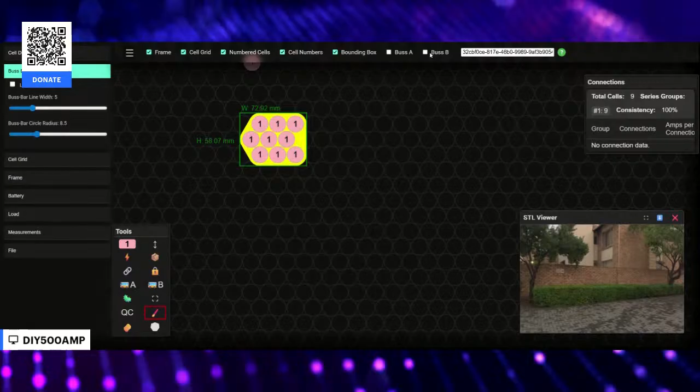Let's change from 1 to 2 to make another battery, another continuation. See, another series. See, how about that? Now we have two series, two groups. See, and it's telling you how many amps you can run in this.

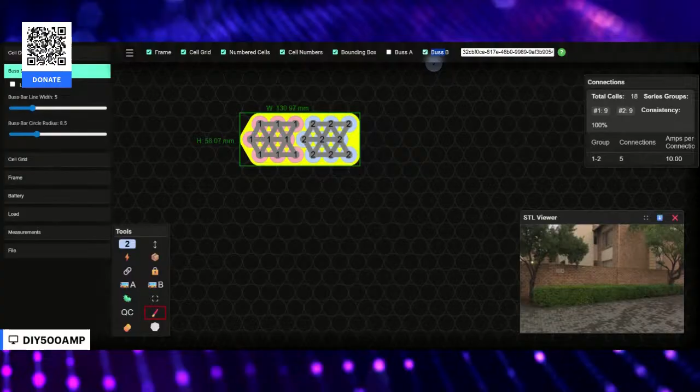Now, if I activate the bus bar, you're gonna see the difference. See, one bus bar is gonna be like this, the other one is gonna be like that. So if I complicate this even more, let's go.

Let me start over. Okay, you use the erase tool, which is this one, and I erase everything. Let's start over, okay? I select the pencil again, and I select the first one. Let's make it more simple, just like this.

Then you can select here number 2, or I'm gonna show you another trick. I can click A and D and check how the numbers go up and down. In the keyboard, A and D.

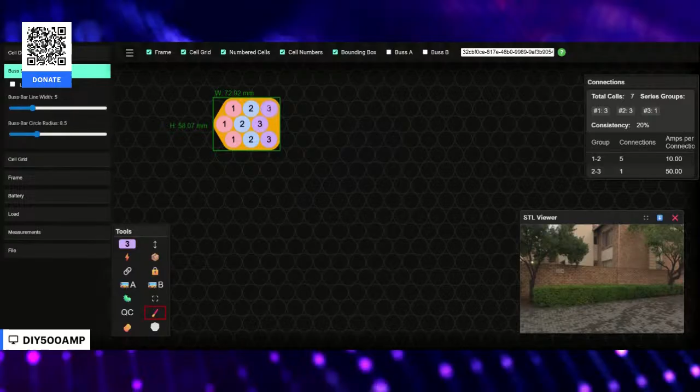So I'm gonna use number 2, number 3, number 4. Is because I want to show you, for example, a 36-volt battery, which is 10 series. Now we have what is going to be a 36-volt battery.

So now if I go in the bus bar, look at how cool this is. It recognizes that. If I select the other one, that's the connection you have to do. One side of the battery, the other side.

If I put both, it's going to show like this, but you know it's both sides together. One side and the other side.

Now, next, if you want to modify this bus bar, you see in the bus bar here, you can click, for example, lock, and then scroll and make it one solid bus bar. See?

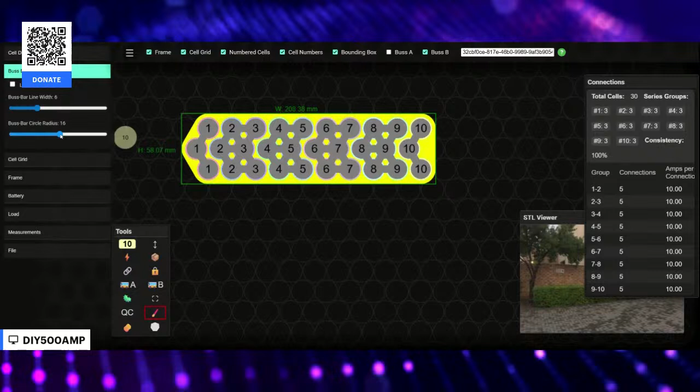Or you can unlock and then work the circle first, which in the circles I like to go, it depends what cell is. I like to go all the way to 15 or 16. Let's put it 15. And then you modify how wide it's gonna be.

And I like going 10 sometimes or 8. It depends how much current do you need. If you need a lot of current, then put it solid, just like this in 13. 13, make it solid already.

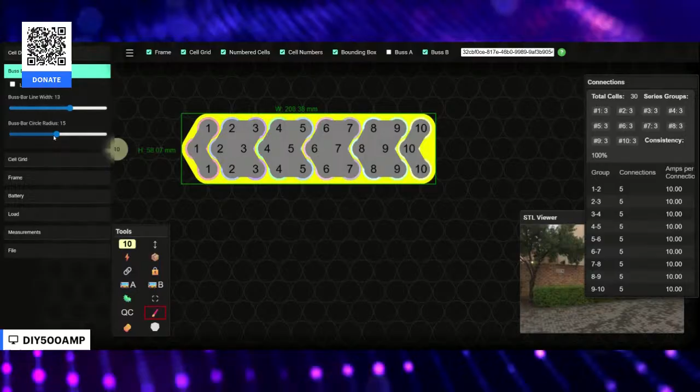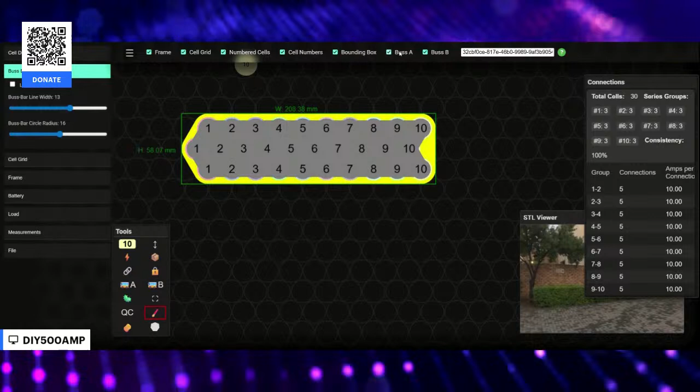See, and here you can modify, you want a wider or smaller bus bar, okay? I have that here. Now I have this bus bar, see? That's how you work the bus bar.

Now, we have the bus bar part. Let's remove the bus bar. Now we can work with the frame. The frame, you can make it wider or thinner, see?

And that's gonna be the frame that is gonna hold the batteries, but you can make it square. You don't have to go completely like that. I can say, okay, I want a square, and not only that, I want the circuit linear. And now you have a completely square frame.

See? However, remember the position that I put this, then I have to modify the position of the cells, right? But let's say that I want to put it back in hexagonal, keep it the frame square. You can do that too.

Or I can put it back in the way that I wanted originally and make it a round frame. See? Just like that. So you can play with that, changing the frame, the quality.

This is important. Keep it for the moment at 32. If you go higher, the computer is gonna get really slow. Why? Because higher quality requires a lot of computing, so it can make your computer slow.

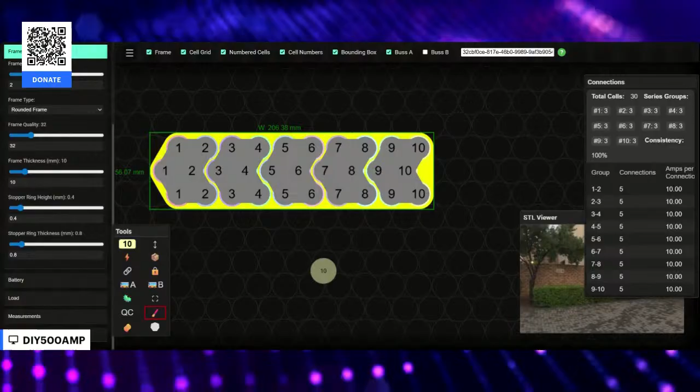Can you print out the bus bar along? Yes, I'm gonna show you now, that's the nice part of the software. For example, you wanna print out only the bus bar. Now I activate the bus bar, let me put it more nice. Let's see, you wanna make a nice fancy bus bar and don't wanna make it like this, you wanna make it look nice like this, right? Maybe smaller, maybe 12, see the circle to maintain the circles, just like that.

Now, first of all, you need to have a license in the software to do this part. I have a license right now, my license is put it here. Please don't copy this because it's not the complete license. Get your own license, this one is not gonna work, but you need more numbers that are hidden. But anyway, Joe is a nice person, if you really want to try the software, talk to him, he maybe give you a trial.

So now, how do I do that? How am I gonna produce only the bus bar here? Look at this option, it generates only the frame. This one generates a case, you can make a case for this. This one allows you to share the battery with somebody else. Now this one is bus bar A, bus bar B.

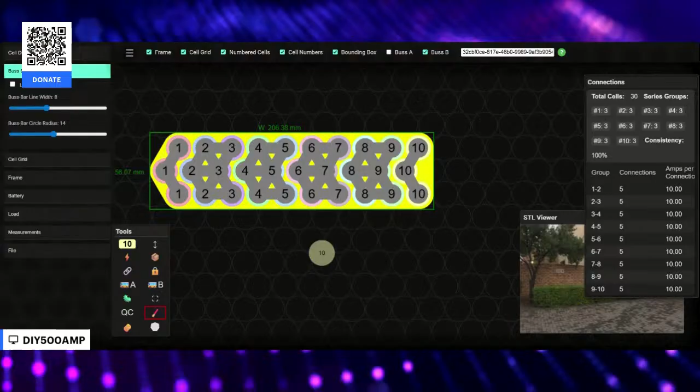Let's start with the B. You click here, bus bar, click only once and wait. Now you have to wait, because now in the background it's working, see, it just came out. So let me make another, let me call this test, and now inside there that's gonna be bus bar B. I'm gonna save it, okay, I save it, and then now I'm gonna do the A.

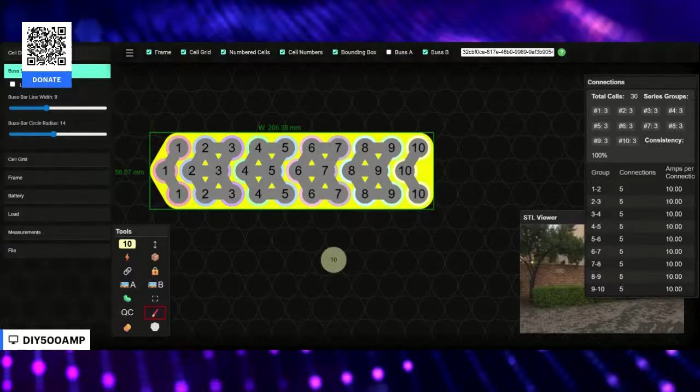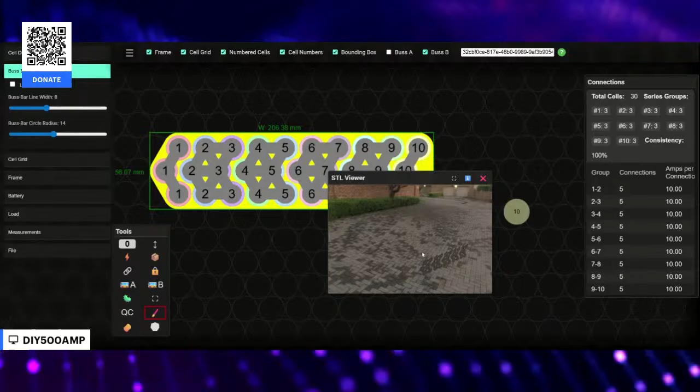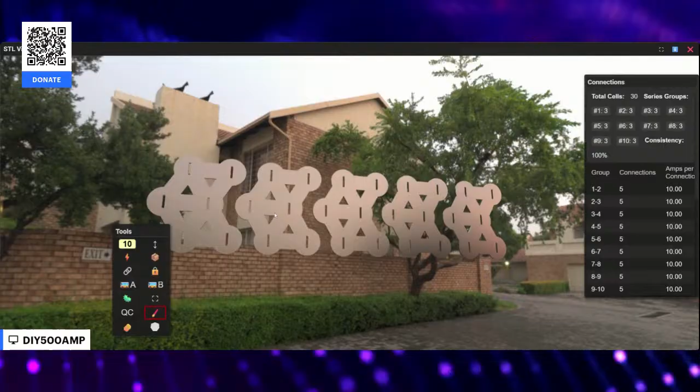Okay, bus bar A, same thing. Wait, it's producing that, and now it's bus bar A. Now I have the files that I can go in Tinkercad and print, or in a printer. However, I haven't shown you this. What I put, bus bars, you can see the bus bars here, look at how cool this is. You need to press Control, keep it pressed, and zoom, or you can go full screen. Look at how cool this is, and the bus bar automatically goes with the lead. That's a modification that I requested, and he did it for me. So you can have your leads and mark the leads, so when I cut this in the laser, it cuts just like that. Buddy, it's amazing, that easy you can get the bus bars.

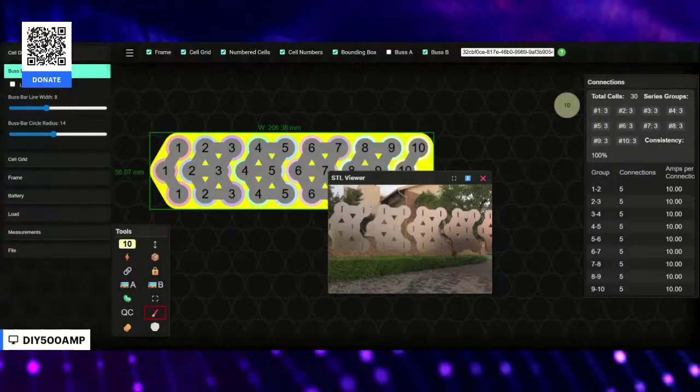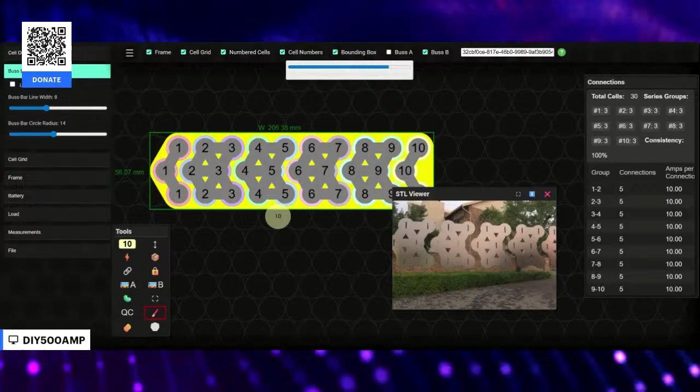However, not only the bus bars, I can get the frame. Let's make the frame now. I click here once and wait. The frame takes longer, okay, just wait for it. Wait, see, it's making it. And once it's making it, instead of opening the file to download, it's gonna show you first the frame here. Look at this, now we have the frame here, you can see how cool this is.

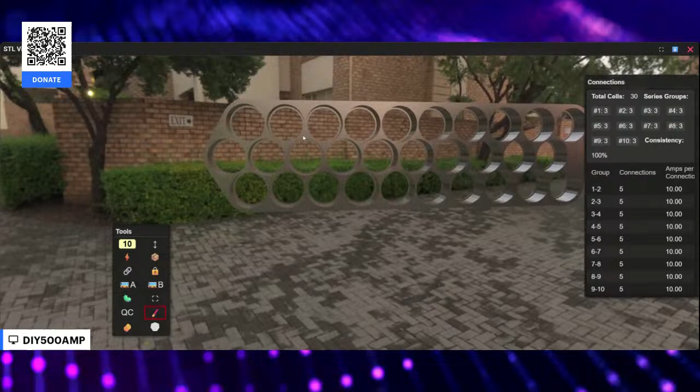So if you understand that you need a wider, see, cell stoppers, how do you fix that? Then you go in the frame, scroll down and see the cell stoppers. This one, the bottom one, is gonna control how wide the circle is gonna be. This one is gonna control how thick the stopper is gonna be. Honestly, keep it at 0.4 or 0.5, then this one I like to put at 1.2. Okay, now that I have that, let's regenerate the frame again. Let me close this to not create confusion. Click once and wait, it's regenerating the frame, and wait until that finishes. Boom, you notice, now I have a wider cell stopper here.

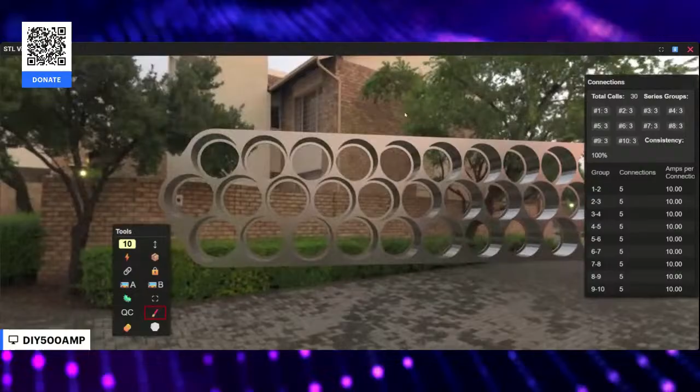You want to make the frame even more quality, you can. How, and here you see the blue thing? That's where I download the frame. I click here, now I'm gonna call it frame.

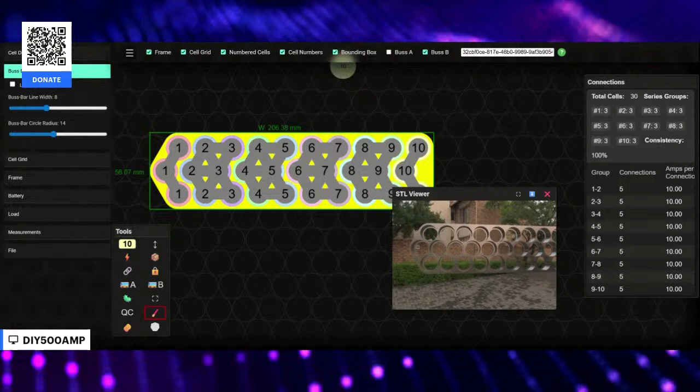I download it. Okay, let me share my full screen. He put a lot of work. Yes man, let me share my full screen, give me one second, this way is gonna be easier. My entire screen, okay.

Okay, I know you see a mess, but it's better like this. Now what I did, I saved it here, the frame, and I saved the bus bars. Okay, now look at how cool this is gonna be.

Now I'm gonna open Tinkercad, for example. You can see it, right? It's Tinkercad, let me make sure you guys can see it. I'm waiting for you to confirm.

I know the video is kind of behind, but I'm sure you're looking at it.

In Tinkercad, I create a new design and open this. Here I can import the design that I just did. Let me find it, it was in client 28. Yeah, test. Now I'm gonna import the frame. Import the frame, and there we go. We got the frame now that we just did in the software.

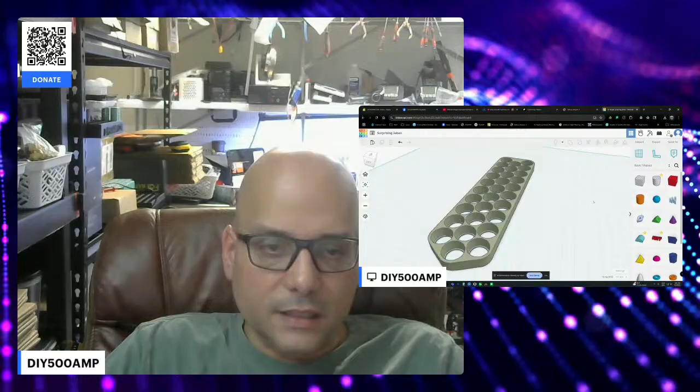It's not that amazing. This is a bug, I guess. Yep, look at that, I found a bug, first time that's happened. I have to recreate that frame. Oh, I know what it is. Let's delete this and go back to the software.

As I mentioned, you remember you can increase the quality. We have to go in frame and change the quality, let me put it in 64. Now we need to recreate the frame. Click frame, that's gonna take longer. The higher that number, the longer it's gonna take, but it's gonna be a higher quality frame. 64.

The default is 32 to be able to move it in the software more easily, but once you finish, crank up that number.

See, now we have the frame here. Now I have to re-download. Clicking here, I'm gonna download the frame. Click frame and override it. Now I save it, go back to Tinkercad, import the frame, and let me see if that problem goes away. It's a bigger file, more quality. I guess that fixed the problem.

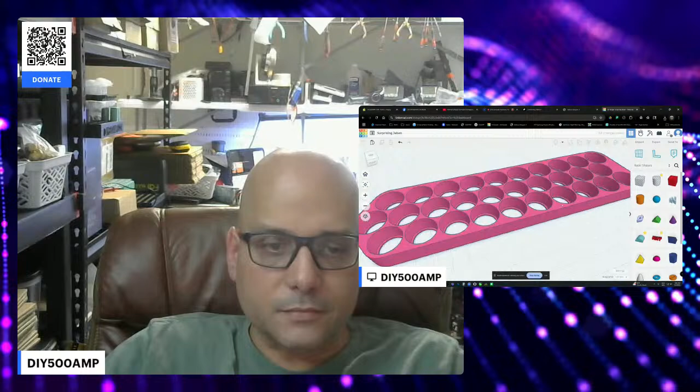Yep, now the problem is gone. See how high quality it is? It doesn't look square anymore. See, very high quality.

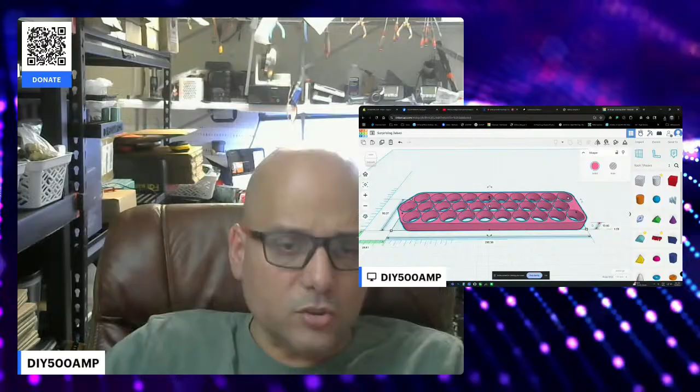Now we have the frame that you can manipulate in here if you want it less thick. In Tinkercad, you put this here, we have 10 millimeters. You can do it as well in the software, you don't have to do it in Tinkercad, you can do it in the software.

Where I am here, you can go in the frame, set the thickness that says 10. I can make it taller, like 33, for example. Regenerate the frame.

Look at this, remember, only click once and wait. We have that in 64, it's gonna take time. It's generating.

Boom, look at this, now we have a thick frame. Look at that, oh, oops, look at that.

If you measure exactly, you can close all the cells with this. Again, if you want that now, you can download it here, clicking here, overwrite the one that I have, save. I'm gonna open Tinkercad, delete this, and import again the frame.

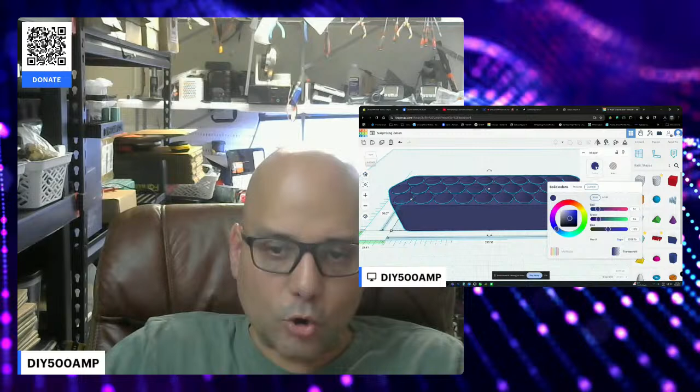Boom. Let me change the color to something easier to see, like this one. Now we have the frame here. Look at that, man.

Now, what about if you want the cells like I do? So you go back to the software, and you can click here. You see this green thing? That's the cells, you can click that.

Wait, wait, and now I have cells. You put the name cells, save it. Now I can go back to Tinkercad, import. Now I'm gonna import the cells. Import.

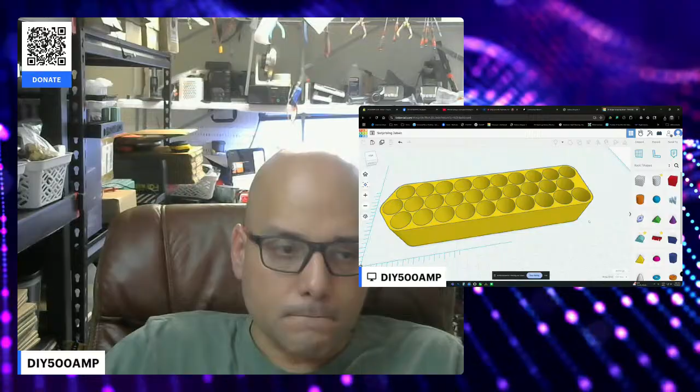Now let me teach you, look at where they went. That's the cells. Remember, they're only 10 millimeters, so I want to make it, what, 70 millimeters. See what I did? Change it here, 70 millimeters. Now we have the cells.

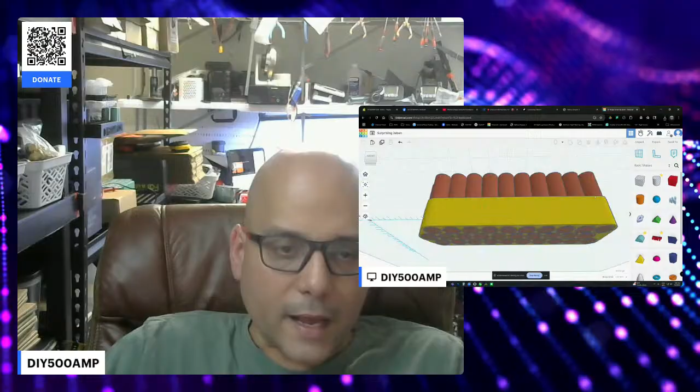What about if I want now the bus bars? That cell looks awful, let me put it in another color, green. Okay.

What about if you want this frame instead to be 33? Let's put it back in 10. And now what about if you want it on top?

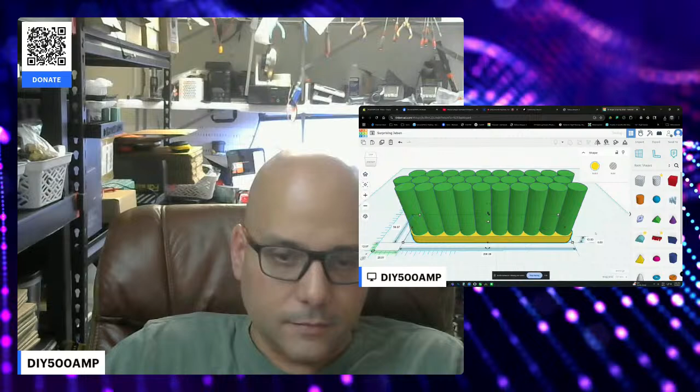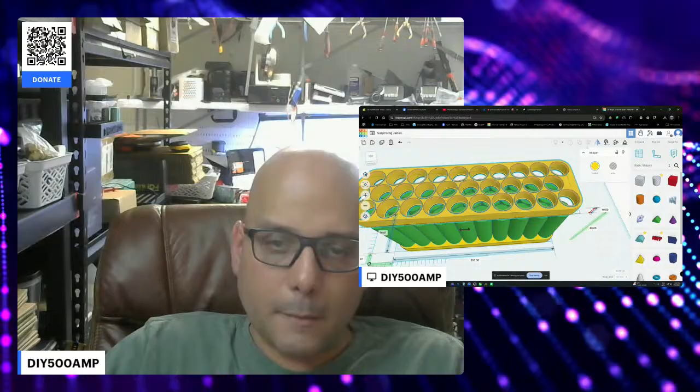Well, in here Tinkercad, I duplicate here, go all the way up, and then turn it. The stopper is backwards, I can click here, here, and click here, and it's gonna flip it. See? Now I push it down again until it goes to the cells. There, now I have a battery.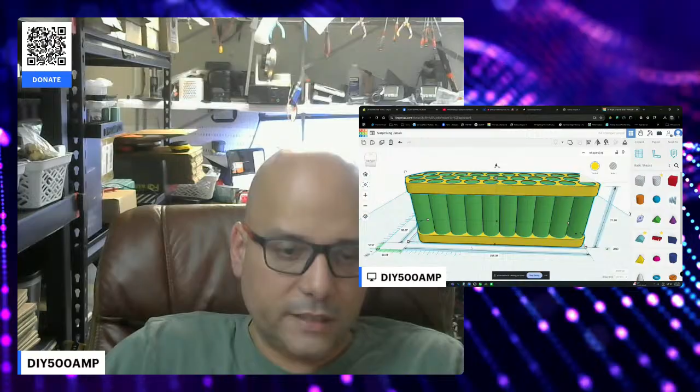What about if I want to use the bus bar? Actually, I'm gonna leave this little bit, the whole thing, because I'm gonna put the bus bars in the bottom. Now I'm gonna import the bus bars.

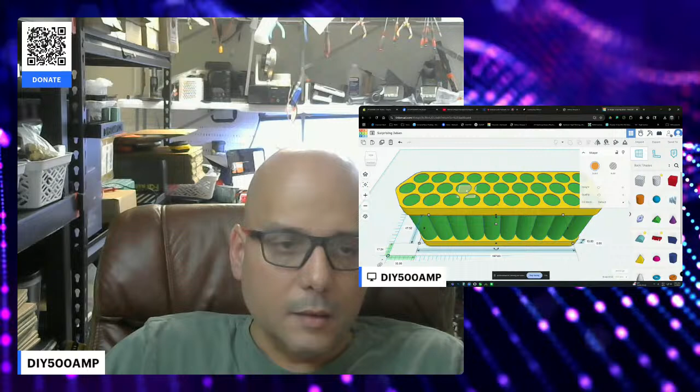Bus bar B. Normally I like to put it on the top. See, that's the bus bar. How I put it on the top, I like to use this tool, put it here. That's my floor now, and I press D. Boom, now I have the bus bar.

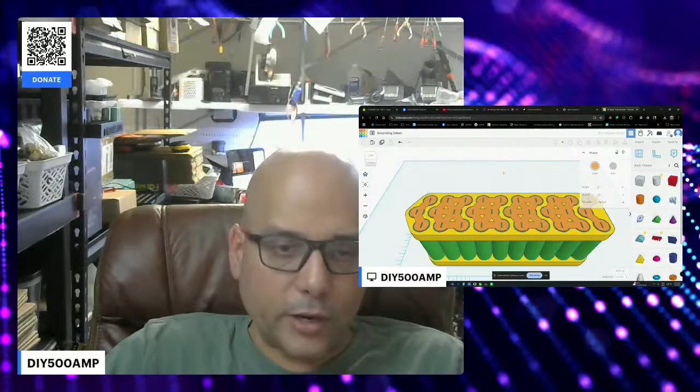But what an ugly look that bus bar is, because by default it's 10 millimeters, which I like to make zero point 0.3. Boom. Now you have a zero point 0.3 copper. Let me put it copper color. Copper.

Now I need to import the next one, that is the bus bar A. I'm sorry, I'm saving instead of importing. Let me cancel that.

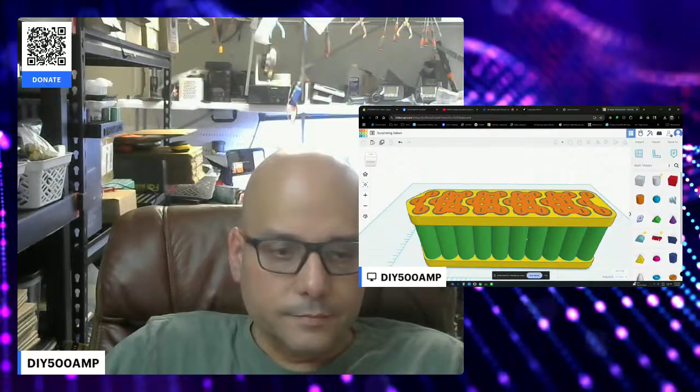Now I can import the other bus bar, the bus bar B, no, the A, and that's gonna import to the bottom. And remember, it's thick, I'm gonna put it back to zero point 0.3. Boom, and change that color to bus bar color. This. Now we have it, but it's not attached. I mean, it's not perfect, but I can fix that.

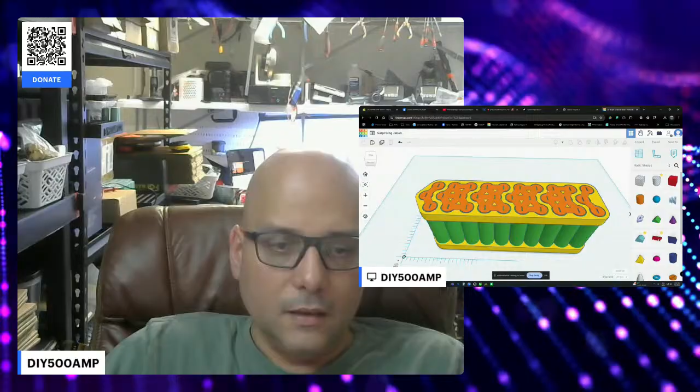Now we have the battery. So if I want to select the whole thing and lift it, so to be able to see the bus bar in the bottom, look at that.

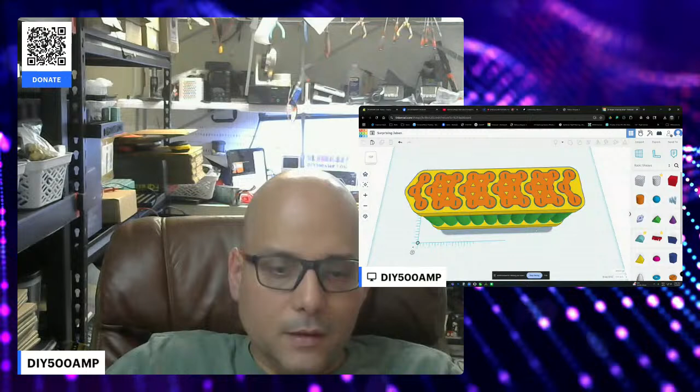Now your question, what about if you want only the bus bars? For example, you remember I have this saved already. If I go in my 3D printer, I'm gonna open my 3D printer, for example, the Bambu.

Let me make sure everybody is looking and I'm not talking alone.

Okay, you're good? Good. I open the Bambu software. It's still open. It's looking for the, let me turn on the printer. It's looking for the printer.

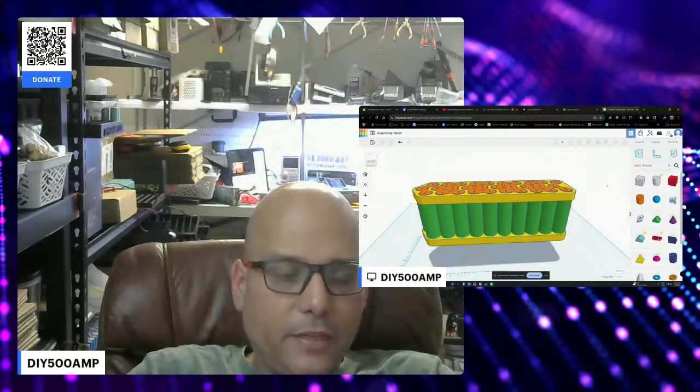Remember, the bus bar that Tinkercad, that the software produces, is to be cut in the laser. This one is to be printed.

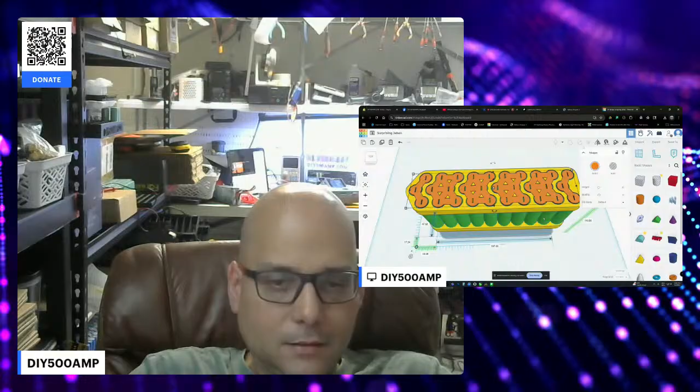So I'm gonna select the bus bar now, just the bus bar, and then export, and you're gonna export as a STL. That's the laser, I mean the 3D printer format.

I'm gonna call it bus bar, bus bar A, and save. And then the next bus bar, export, bus bar B, save.

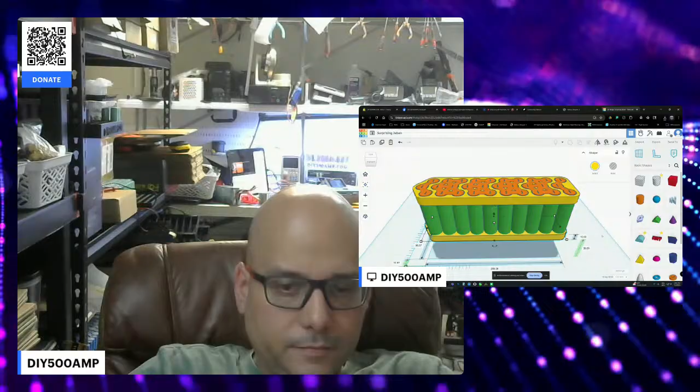Now I want to export the... I got it already, I guess I got it already. But this version is 10 millimeters. Let me export the frame. Export. This one is gonna be the frame. Frame two, I'm gonna call it frame two.

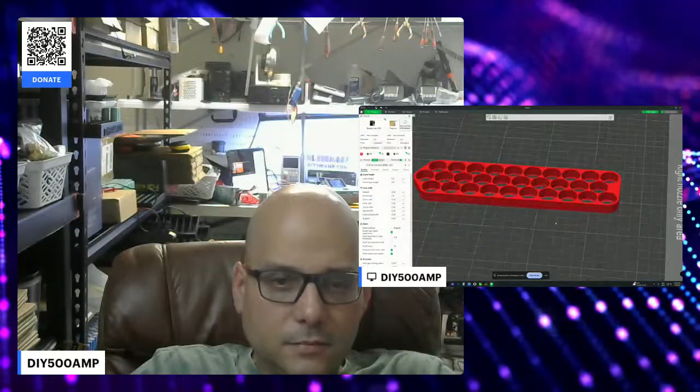Okay, now I go back to the printer and now I import that I just did, which is inside here, frame two. Now I have the frame, see, ready to print. I want the bus bar A, see, very thin, bus bar B. I click here in the printer to accommodate everything for me, see, and now it's ready to print.

However, I want to change the color. My printer, I can change color. So I can select everything and I can select, for example, black ABS or whatever I want. Whatever I want, I can do in this printer.

So if I go back, synchronize now to see all my filaments, let me go back in my filaments and select another color. I need to add it, the color. Sorry about that, I need to add that in here. Let me add another color.

Instead of black, let's see blue. White. Now I can print that in white. And that's how you can print these bus bars.

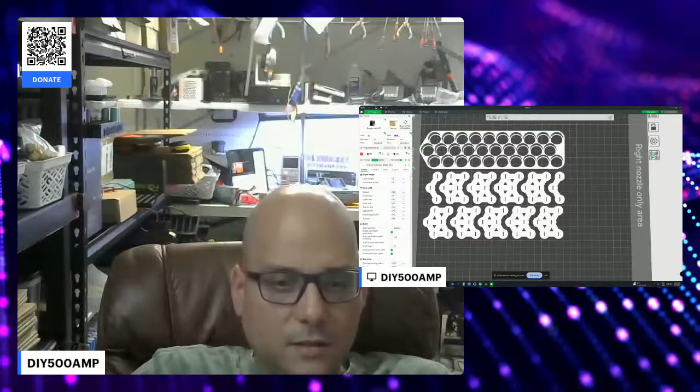And then once you have that printed, you can use a magic marker on top of a copper piece. Once you have this piece printed, I mean, you don't have to go with zero, that's too thin. You can go even with a thicker 1 millimeter, for example, and print that and use it. However, this one you want to keep like that because that's gonna be your real cell holder. It's gonna print just like that.

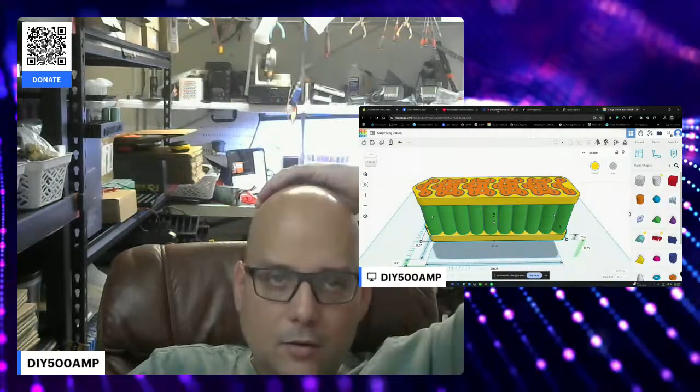Okay buddy, and that's how have you played with making a case for packs? Yes, let me show you something.

Now I'm gonna go back in Tinkercad, open my designs, and you see the designs. You remember the designs for the cells? That's how, look at this, I make this triangle for a client.

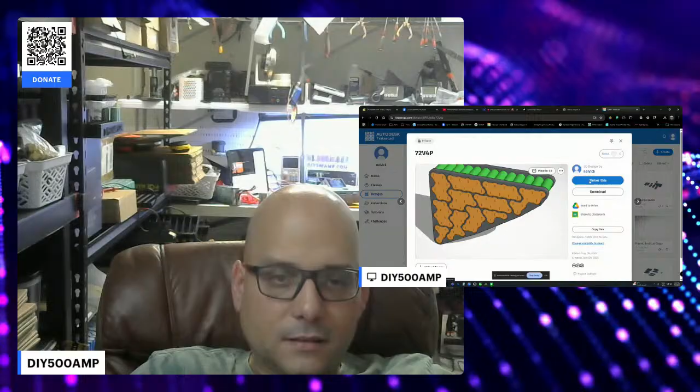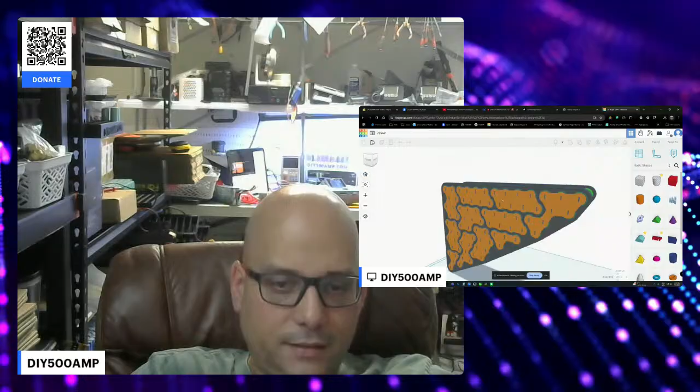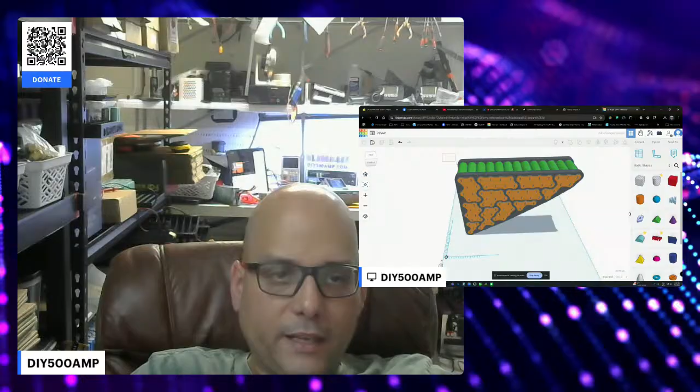Look at this triangle, buddy. I can print this and cut this in the laser, and I print this triangle in my printer and build this. That's the beauty of this. If you can see it here, you can measure it. Look, I'm gonna put the ruler on the floor, and now I have measurement when I select something. That's real numbers. If I have these numbers here, I can do it in real life.

Okay, so let me show you now the cases. Maybe I have cases here to show you. Let's see, I may have cases that I built for clients. Let me see. That was the giveaway, maybe it's somewhere else. I'm gonna show you something very nice. Let me see where I put it.

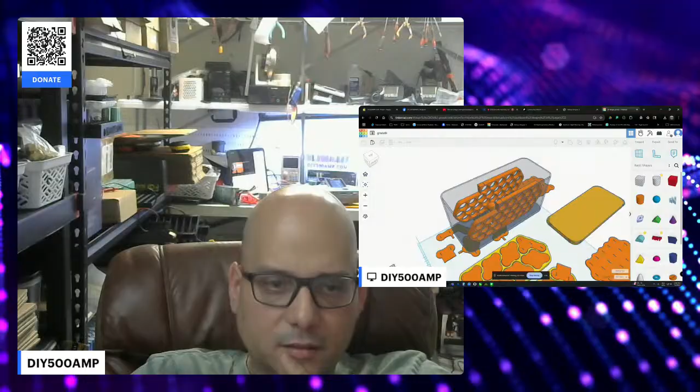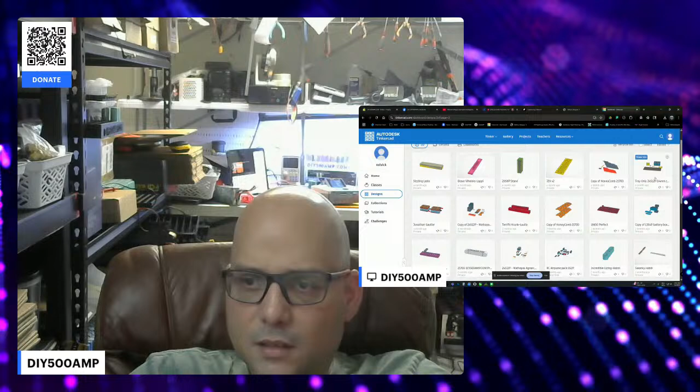I guess it's one of these ones. Let me check this one first. Yeah, well, that's not the one I'm looking for. But this is a case that I make right now. You see it like transparent, but I can make it solid. That's not the best one though. Let me check the other one. Let me find the one I'm looking for. I guess it's, let me see.

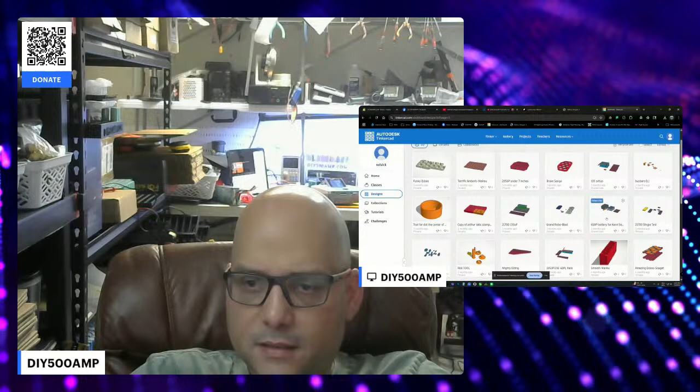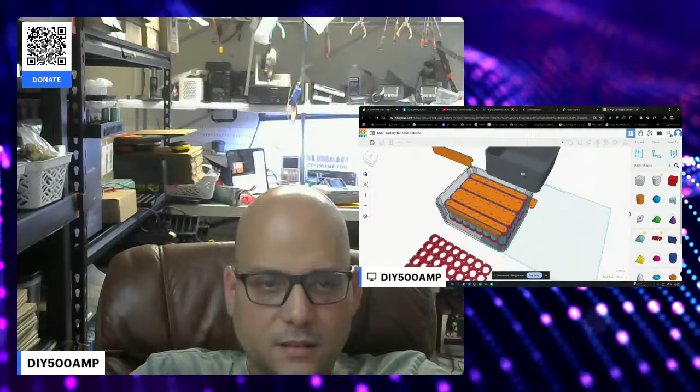I really want to find that one. Give me one second, I'm gonna find it. Sometimes Tinkercad doesn't show everything. Maybe is this one? Maybe no, maybe not, maybe that one. Let me see. No, that was another case, but that's not the one I'm looking for. That's another design. This is a design I have to do for a client already. Let me find the one, man. I really want to show you that one.

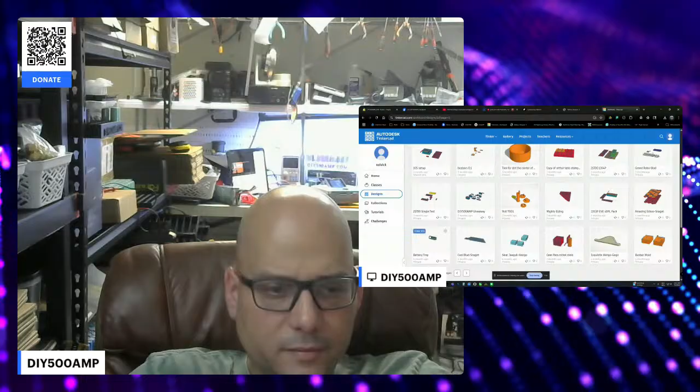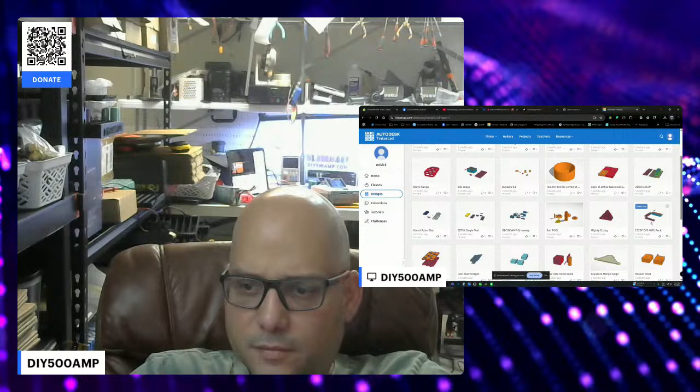It must be inside one of these. Let's see, no, it's not this. That's something else I was working with. Man, sorry about that. No, it's not this either. I'm really gonna find it, buddy. No, that one not. You need to see it, man. Where did I put it. Let me see if it's this one. I should mark it, it's just that I wasn't. That's something else, that's something else. See, the computer is kind of loaded, but let me, man, I'm gonna find it.

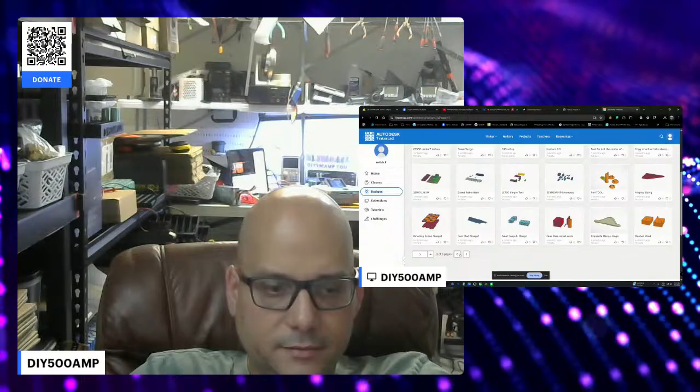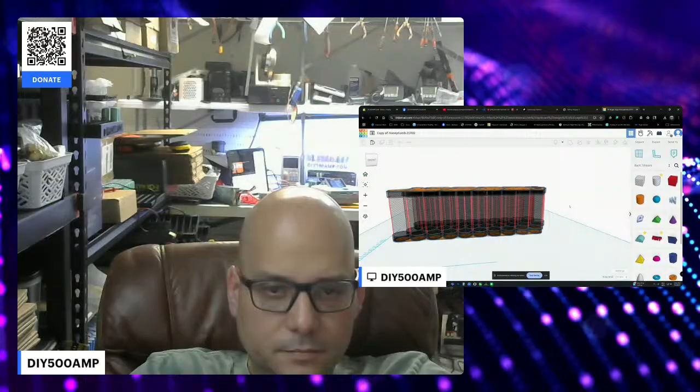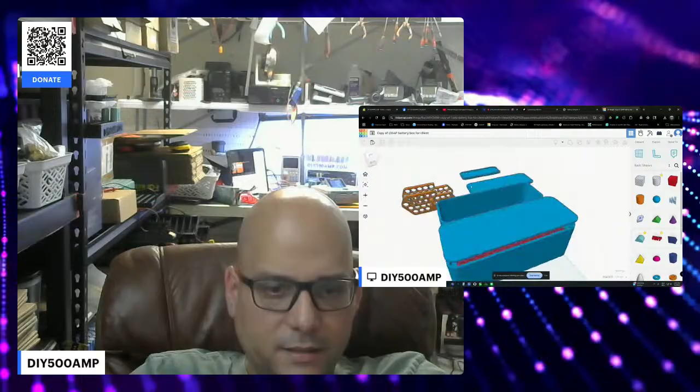I guess it's one called, let me see if it's one called Honeycomb. Maybe this one, let me see. No, it's not this one either. That's another design. See, that's many ways you can do designs. But it's gonna be close, it's gonna be close, man. No, it's not this one. Maybe this one, maybe, okay. Yeah, this one is. See, in here I play with.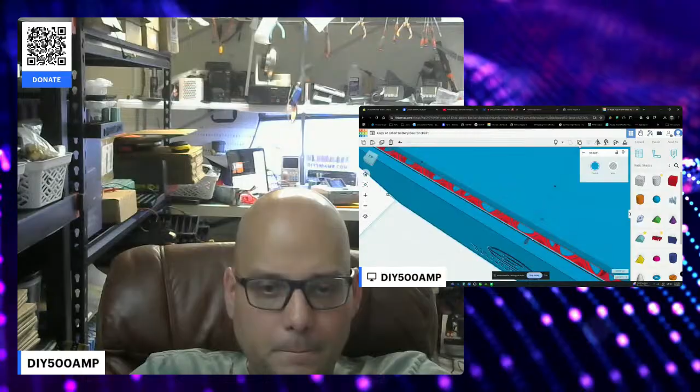Let me make this disappear. See, this one was for a client. Look at the case, I put even deep holes, and when you print this, it's gonna show the holes. See the holes? That's what I want to show you. But that's a process to make this happening. So that was his logo. He sent me the logo and I imported it in here, and I make it into the case, and I even make the holes. See the screws, the holes, and in the cap as well, so he can use screws to close this case. This is completely functional.

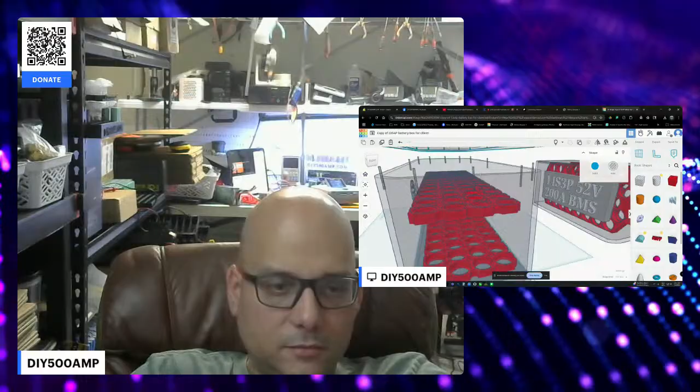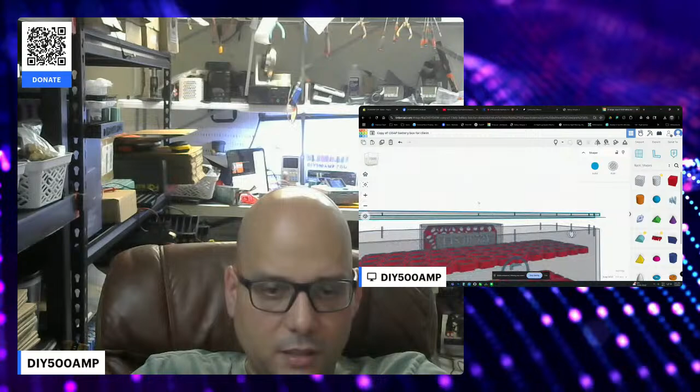Look at this. That's the holes for the screws in the cap and in the case. See, and there's a hole here to take out the cable. And that was the bus bar, I mean the thing that he's gonna use. So I leave space on top for the BMS, just like here. This is acting like the space for the BMS, see? And I make those cases, so you can actually print this in the 3D printer and you have a case. See? It's different. I mean, that's how, see how I import this.

That's what I put there. So I don't know who's here. Let me see who is in here other than you. Sources, let me close this. Put the chat up so you can see, man.

The software is amazing, so that's the sales side. Now the software allows me to generate a case. Let me see how the case looks. This part is experimental right now, he's still working, fine-tuning this part. Let's see what it does here.

It's in high quality, it's gonna take time. Okay, man, I have to go and eat. I'm gonna finish the other battery, that's when I'm gonna do it offline, to do it quickly because I have to give that to the client. But let me wait until that finishes.